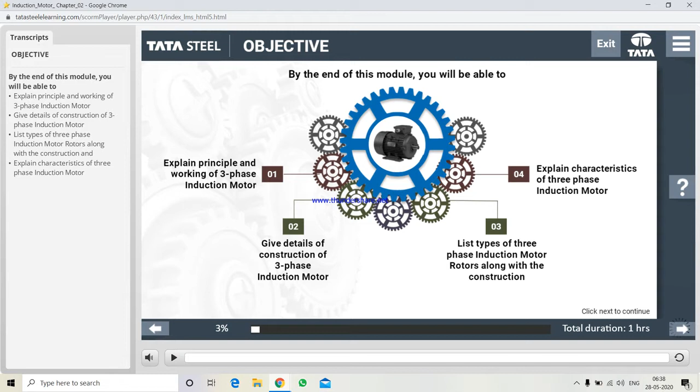With this, we are done with the single-phase induction motor. Now comes the three-phase induction motor.

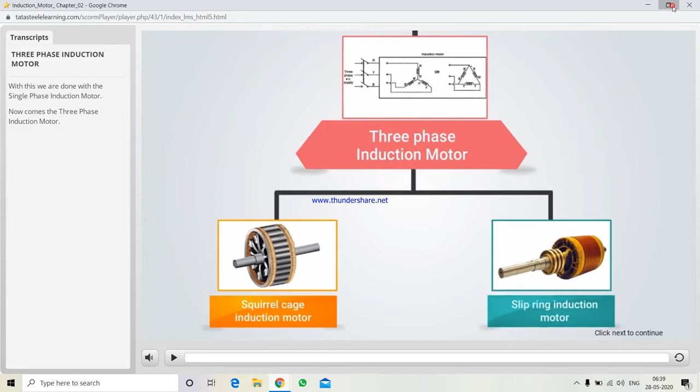Here are 4 questions related to three-phase induction motor. First, what is rotating magnetic field? Second, why is three-phase induction motor self-starting? Third, what is the working principle of three-phase induction motor? And fourth, why are they so common in industry? Click each to know the answer.

Balanced three-phase winding that is mechanically displaced by 120 degrees from each other, fed by balanced three-phase source, a rotating magnetic field with constant magnitude is produced, rotating with a constant speed called synchronous speed,

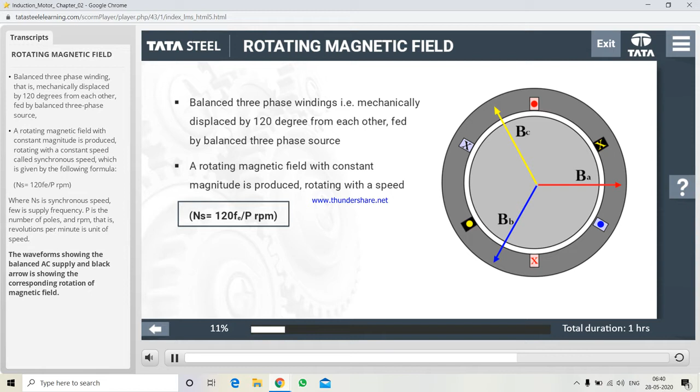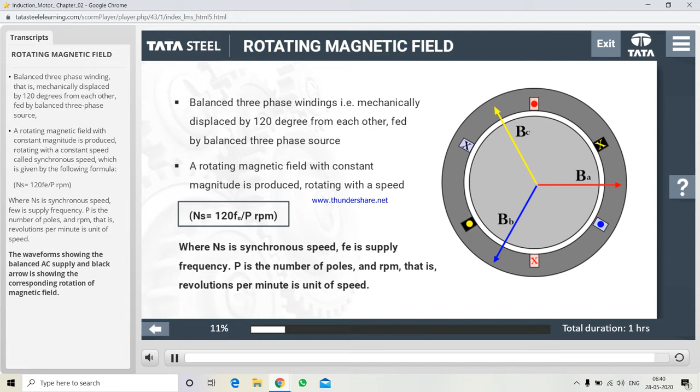which is given by the following formula: Ns equals 120 Fe upon P rpm, where Ns is synchronous speed, Fe is supply frequency, P is the number of poles, and rpm, that is revolutions per minute, is unit of speed. The waveforms show the balanced AC supply and the black arrow is showing the corresponding rotation of magnetic field.

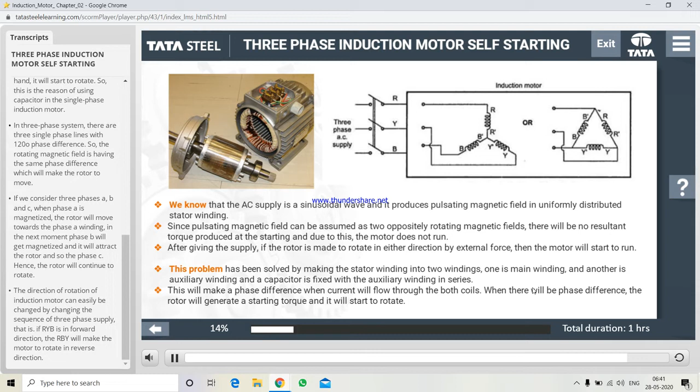This will make a phase difference when current will flow through both coils. When there is phase difference, the rotor will generate a starting torque and it will start to rotate. Practically, we can see that the fan does not rotate when the capacitor is disconnected from the motor. But if we rotate it with hand, it will start to rotate. So, this is the reason for using a capacitor in the single-phase induction motor.

In three-phase system, there are three single-phase lines with 120-degree phase difference. So, the rotating magnetic field has the same phase difference, which will make the rotor move. If we consider three phases, A, B and C, when phase A is magnetized, the rotor will move towards the phase A winding. In the next moment, phase B will get magnetized and it will attract the rotor, and so the phase C. Hence, the rotor will continue to rotate.

The direction of rotation of induction motor can easily be changed by changing the sequence of three-phase supply. That is, if RYB is in forward direction, RBY will make the motor rotate in reverse direction.

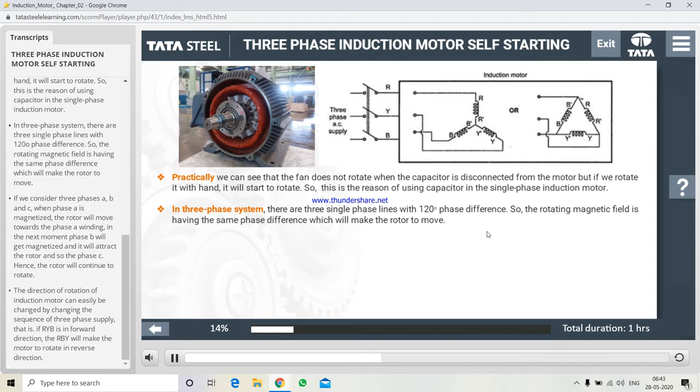Practically, we can see that the fan does not rotate when the capacitor is disconnected from the motor. But if we rotate it with hand, it will start to rotate. So, this is the reason for using a capacitor in the single-phase induction motor. In three-phase system, there are three single-phase lines with 120-degree phase difference. So, the rotating magnetic field has the same phase difference, which will make the rotor move.

If we consider three phases, A, B and C, when phase A is magnetized, the rotor will move towards the phase A winding. In the next moment, phase B will get magnetized and it will attract the rotor, and so the phase C. Hence, the rotor will continue to rotate. The direction of rotation of induction motor can easily be changed by changing the sequence of three-phase supply. That is, if RYB is in forward direction, RBY will make the motor rotate in reverse direction.

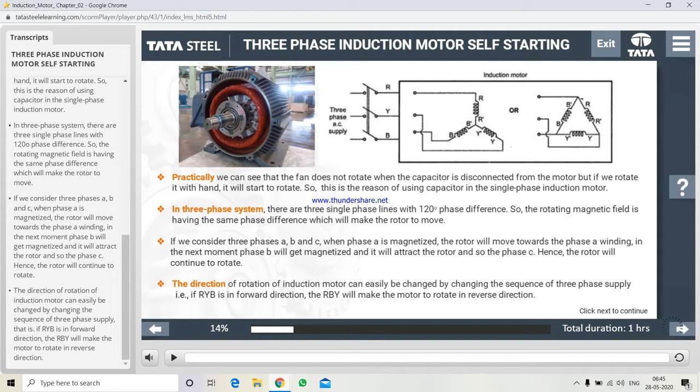The stator of the motor consists of overlapping winding offset by an electrical angle of 120 degrees. When the primary winding or the stator is connected to a three-phase AC source, it establishes a rotating magnetic field which rotates at the synchronous speed. From the working principle of three-phase induction motor, it may be observed that the rotor speed should not reach the synchronous speed produced by the stator.

If the speed equals, there would be no relative speed, so no EMF would be induced in the rotor and no current would be flowing, and therefore no torque would be generated. Consequently, the rotor will not be able to reach the synchronous speed. The difference between the stator or synchronous speed and rotor speeds is called the slip.

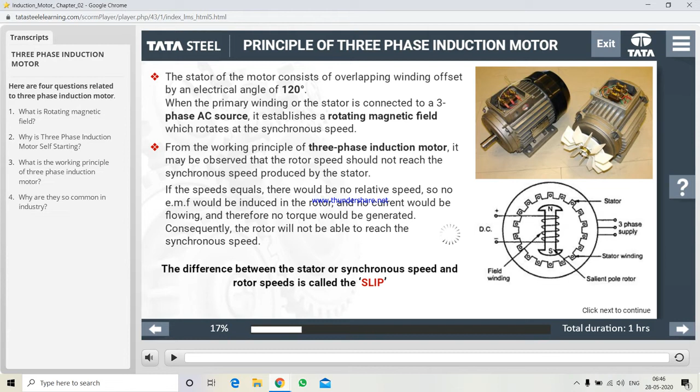Three-phase induction motors are very common because of the following points. Simple in construction, it has only one moving part. It doesn't have brush gear and commutator. Now comes with VSD technology, that is, variable speed drive.

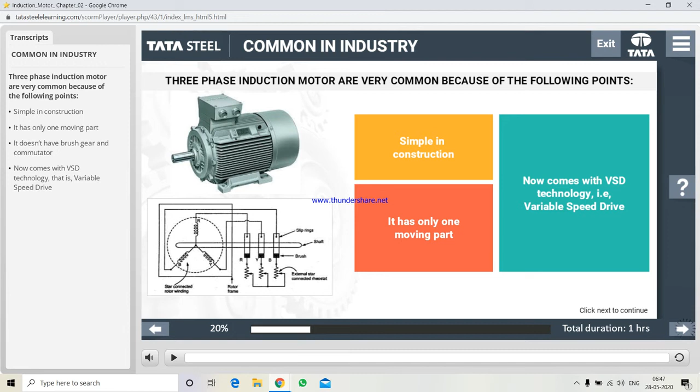Three-phase induction motor has two main parts, stator and rotor. Click each to get an overview. As its name indicates, stator is a stationary part of induction motor. A stator winding is placed in the stator of induction motor and the three-phase supply is given to it.

The rotor is a rotating part of induction motor. The rotor is connected to the mechanical load through the shaft. The rotor of the three-phase induction motor is further classified as squirrel cage rotor, slip ring rotor or wound rotor or phase wound rotor.

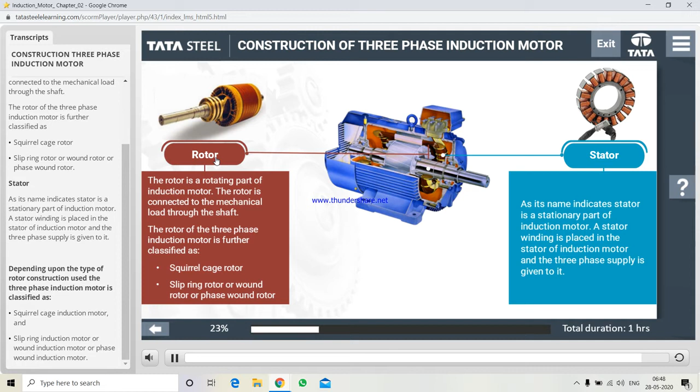Depending upon the type of rotor construction used, the three-phase induction motor is classified as squirrel cage induction motor and slip ring induction motor or wound induction motor or phase wound induction motor.

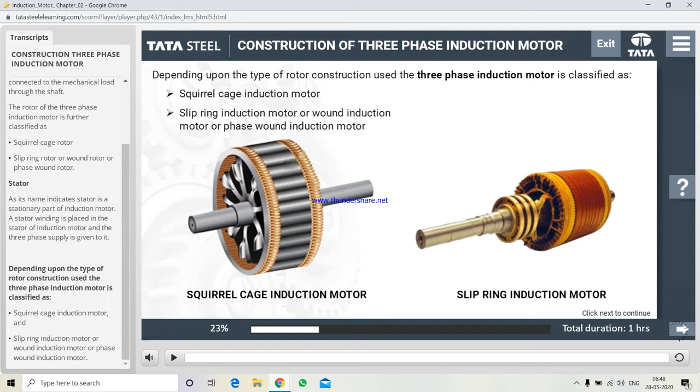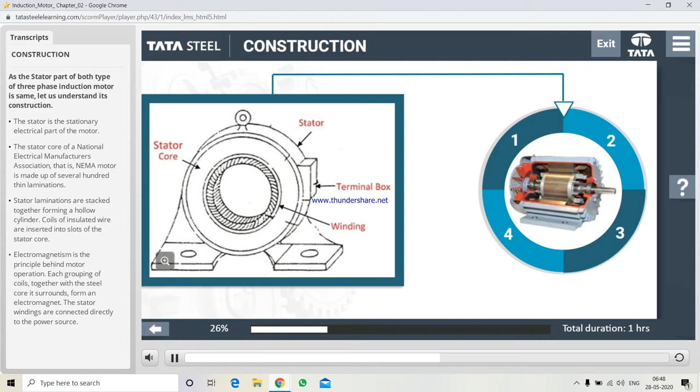As the stator part of both types of three-phase induction motor is the same, let us understand its construction. The stationary electrical part of the motor. The stator core of a National Electrical Manufacturers Association, that is, NEMA motor is made up of several hundred thin laminations. Stator laminations are stacked together, forming a hollow cylinder. Coils of insulated wire are inserted into slots of the stator core.

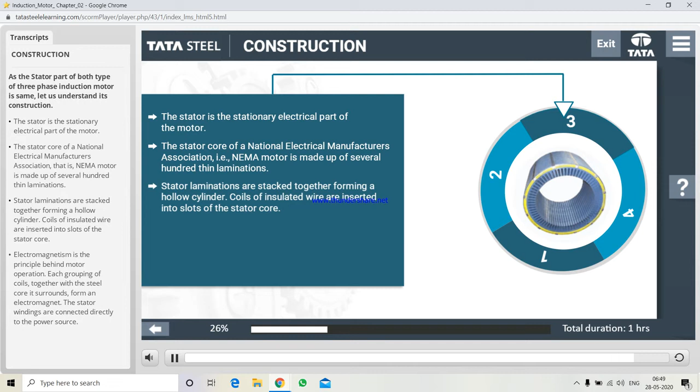Electromagnetism is the principle behind motor operation. Each grouping of coils, together with the steel core it surrounds, forms an electromagnet. The stator windings are connected directly to the power source.

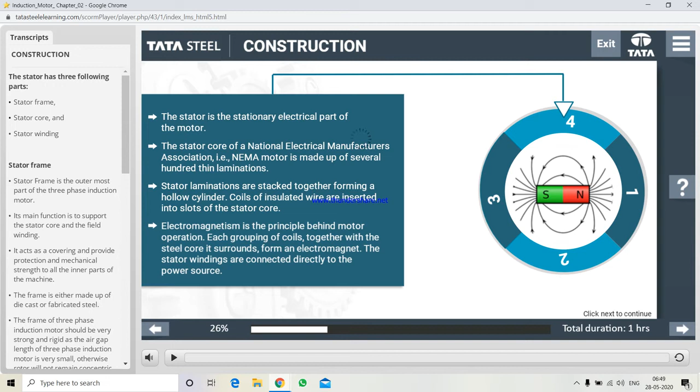The stator has three following parts: stator frame, stator core, and stator winding. Click each circle to know more. The main function of the stator core is to carry alternating flux. In order to reduce the eddy current losses, the stator core is laminated.

This laminated type of structure is made up of stampings, which are about 0.4 to 0.5 millimeter thick. All the stampings are stamped together to form the stator core, which is then housed in the stator frame. The stamping is generally made up of silicon steel, which reduces the hysteresis loss.

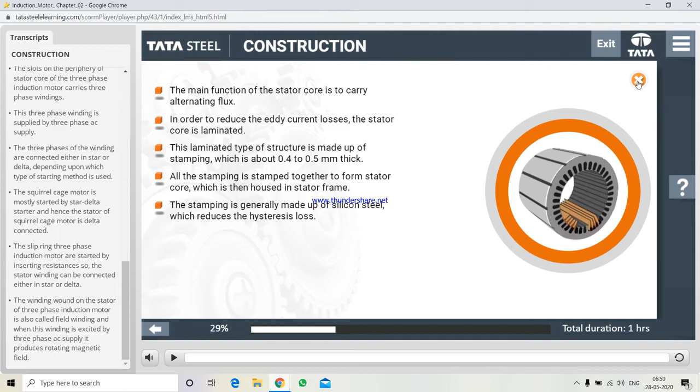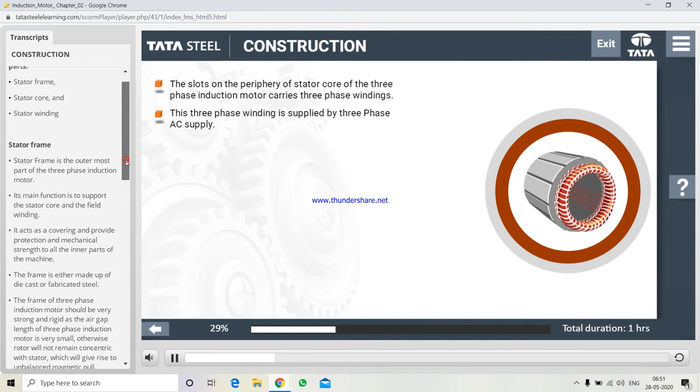The slots on the periphery of stator core of the three-phase induction motor carry three-phase windings. This three-phase winding is supplied by three-phase AC supply. The three phases of the winding are connected either in star or delta depending upon which type of starting method is used. The squirrel cage motor is mostly started by star-delta starter, and hence the stator of squirrel cage motor

is delta connected. The slip ring three-phase induction motors are started by inserting resistances, so the stator winding can be connected either in star or delta. The winding wound on the stator of three-phase induction motor is also called field winding, and when this winding is excited by three-phase AC supply, it produces rotating magnetic field.

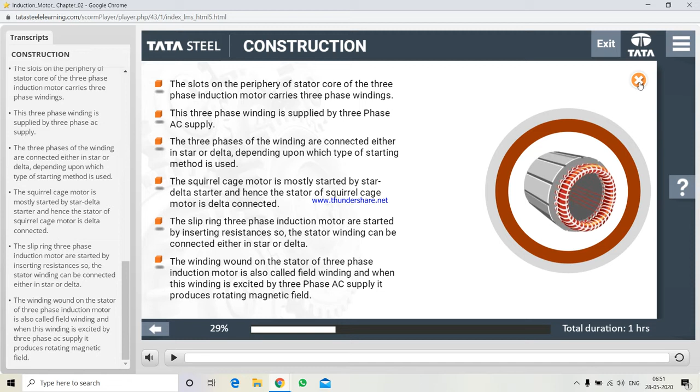Stator frame is the outermost part of the three-phase induction motor. Its main function is to support the stator core and the field winding. It acts as a covering and provides protection and mechanical strength to all the inner parts of the machine. The frame is either made up of die-cast or fabricated steel.

The frame of three-phase induction motor should be very strong and rigid, as the air gap length of three-phase induction motor is very small. Otherwise, rotor will not remain concentric with stator, which will give rise to unbalanced magnetic pull.

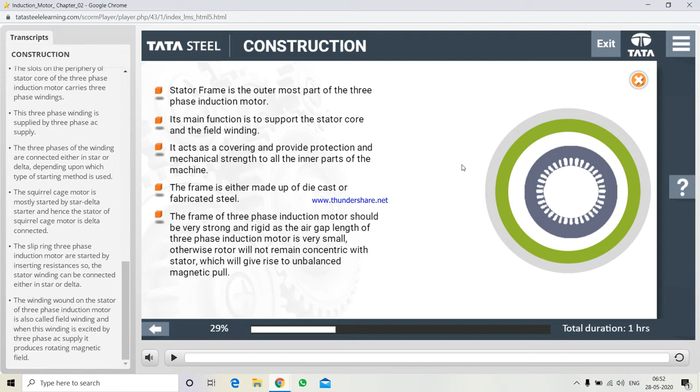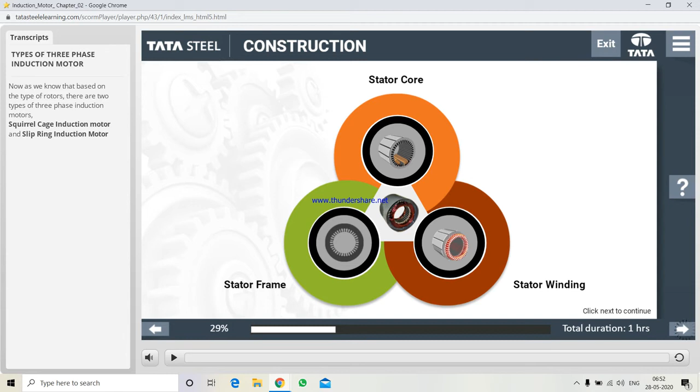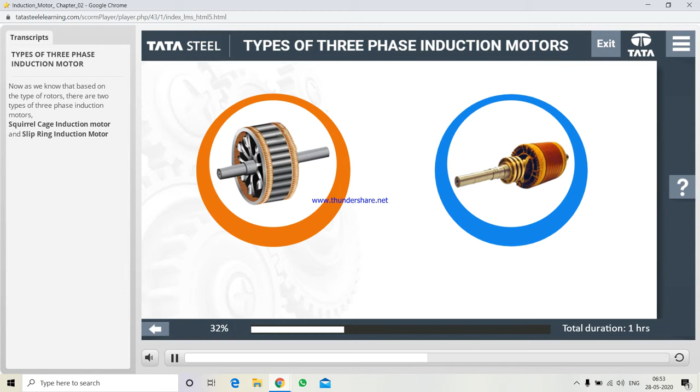Now, as we know that based on the type of rotors, there are two types of three-phase induction motors: squirrel cage induction motor and slip ring induction motor. Click each circle to know more.

The rotor of the squirrel cage three-phase induction motor is cylindrical in shape and has slots on the periphery. The slots are parallel to each other and are a bit skewed to prevent magnetic locking of the stator and rotor teeth, and make the working of the motor more smooth and quiet.

The squirrel cage rotor consists of aluminium, brass or copper bars that are placed in the slots on the periphery of the rotor. The rotor conductors are permanently shorted by copper or aluminium rings called the end rings, forming a complete closed circuit resembling a squirrel cage, hence the name squirrel cage induction motor.

The absence of slip rings and brushes makes the construction of the squirrel cage three-phase induction motor very simple and robust, and hence it is widely used as a three-phase induction motor. These motors have the advantage of adapting any number of pole pairs. The squirrel cage rotor winding is made symmetrical. As the bars are permanently shorted by end rings, the rotor resistance is very small and it is not possible to add external resistance.

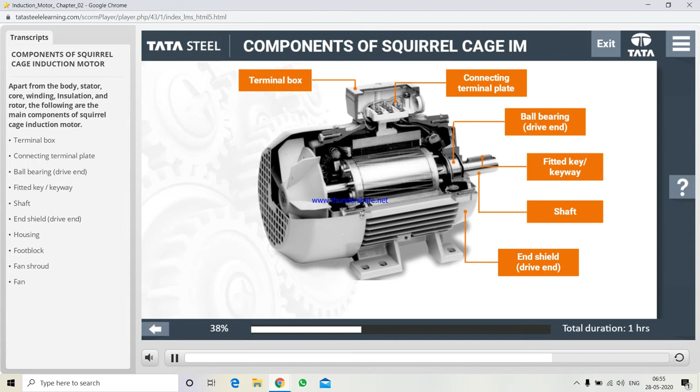Apart from the body, stator, core, winding, insulation and rotor, the following are the main components of the squirrel cage induction motor: terminal box, connecting terminal plate, ball bearing, drive end, fitted key or keyway, shaft, end shield, drive end, housing, foot block, fan shroud, fan. Click Next to continue.

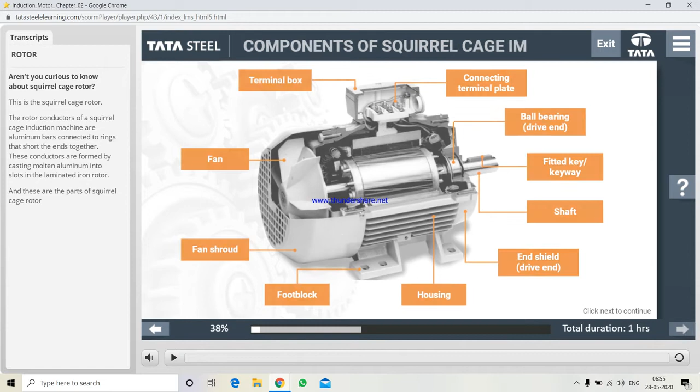Aren't you curious to know about the squirrel cage rotor? Click the thumbs up to know more. This is the squirrel cage rotor. Click the image to go inside the rotor.

The rotor conductors of a squirrel cage induction machine are aluminium bars connected to rings that short the ends together. These conductors are formed by casting molten aluminium into slots in the laminated iron rotor. And these are the parts of the squirrel cage rotor. Click Next to continue.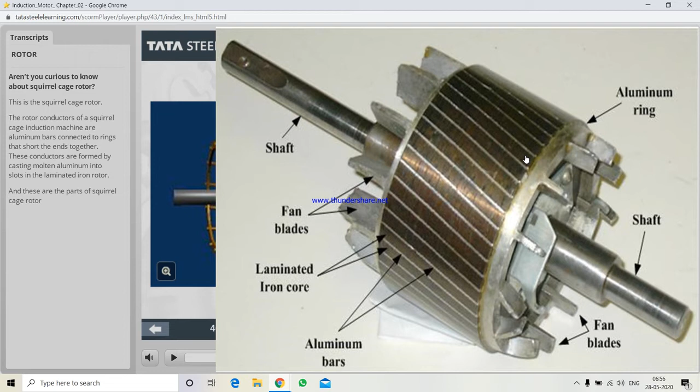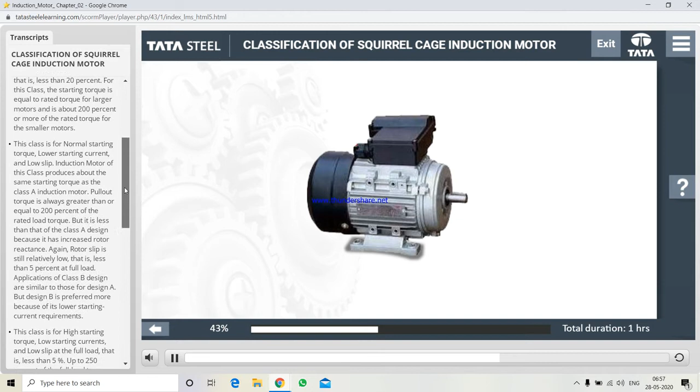NEMA, the National Electrical Manufacturers Association in the United States, and IEC in Europe have classified the design of squirrel cage induction motors based on their speed-torque characteristics into classes. These classes are Class A, Class B, Class C, Class D, Class E and Class F.

This class is for high starting torque, low starting currents and low slip at full load, that is less than 5%. The starting torque in this class of design is up to 250% of the full load torque. The pull-out torque is lower than that for Class A induction motors. In this design, the motors are built from double cage rotors. They are more expensive than motors of Class A and B. Class C designs are used for high starting torque loads like loaded pumps, compressors, and conveyors.

This class is for very low starting torque, normal starting current, and low slip. Compensator or resistance starters are used to control starting current.

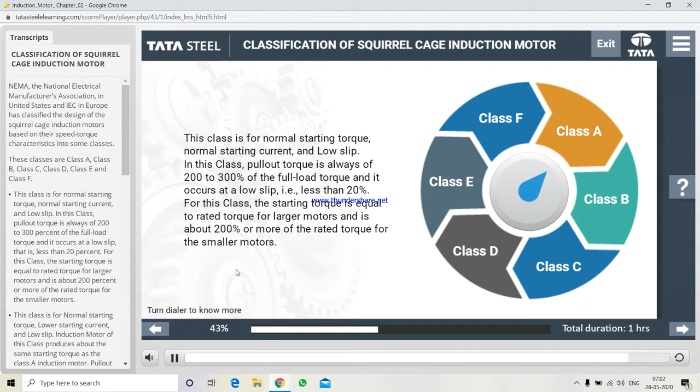This class is for normal starting torque, lower starting current, and low slip. Motor of this class produces about the same starting torque as the Class A induction motor. Pull-out torque is always greater than or equal to 200% of the rated load torque. But it is less than that of the Class A design because it has increased rotor reactance. Again, rotor slip is still relatively low, that is less than 5% at full load.

Applications of Class B design are similar to those for Design A, but Design B is preferred more because of its lower starting current requirements. In this class, motors have very high starting torque of around 275% or more of the rated torque. The motors of this class have low starting current and high slip at full load.

Also, in this class of design, the high rotor resistance shifts the peak torque to a very low speed. It is even possible at 0 speed or 100% slip for the highest torque to occur in this class of design. Full load slip, which is typically 7 to 11%, but may go as high as 17% or more, is quite high in this class because of the high rotor resistance.

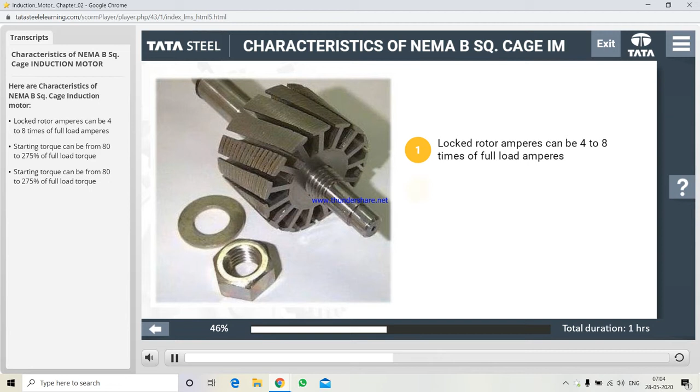Here are characteristics of NEMA B squirrel cage induction motor. Locked rotor amperes can be 4 to 8 times of full load amperes. Starting torque can be from 80 to 275% of full load torque. Breakdown torque can be from 175 to 300% of full load torque.

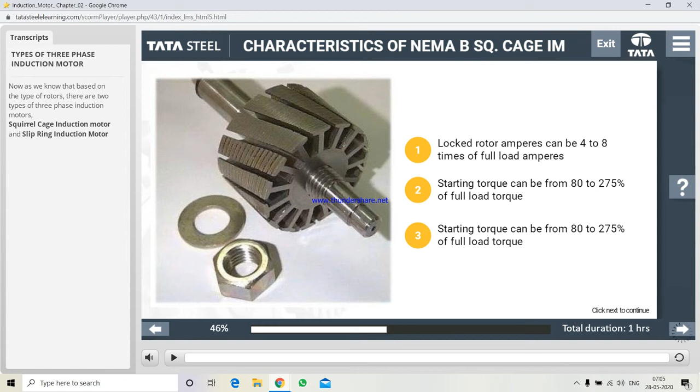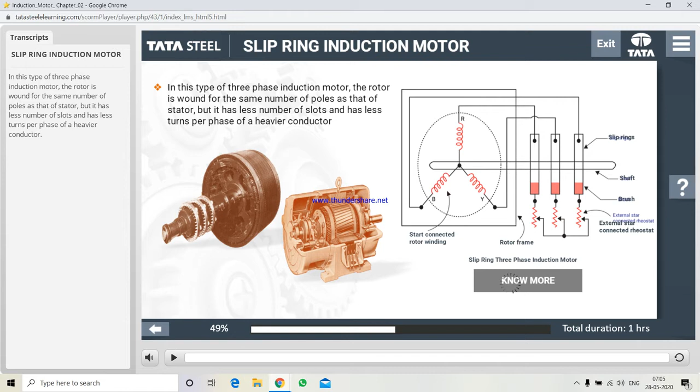In this type of three-phase induction motor, the rotor is wound for the same number of poles as that of stator, but it has less number of slots and has less turns per phase of a heavier conductor. The rotor consists of numbers of slots and rotor windings are placed inside these slots. The three end terminals are connected to form star connection.

At starting, the resistances are connected in rotor circuit and are gradually cut out as the rotor picks up its speed. When the motor is running, the slip rings are shorted by connecting a metal collar which connects all slip rings together, and the brushes are also removed. This reduces wear and tear of the brushes. Due to presence of slip rings and brushes, the rotor construction becomes somewhat complicated. Therefore, it is less used as compared to squirrel cage induction motor.

As its name indicates, it consists of slip rings connected on same shaft as that of rotor. The three ends of three-phase windings are permanently connected to these slip rings. The slip rings are insulated from each other and the rotor shaft. The brushes are used to carry current to and from the rotor winding. These brushes are further connected to three-phase star-connected resistances. The external resistance can be easily connected through the brushes and slip rings and hence can be used for speed control and improvement of the starting torque of the motor.

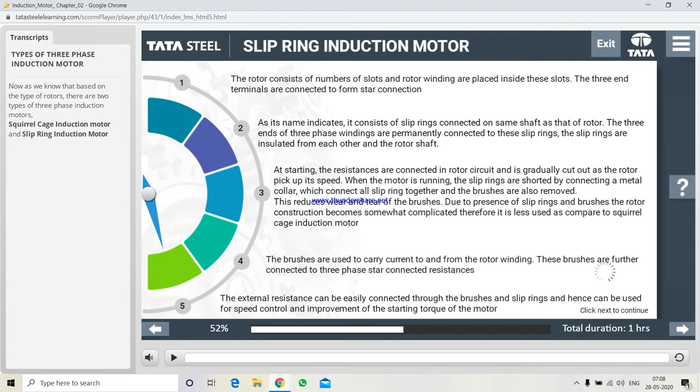To refresh our knowledge of both squirrel cage induction motor and slip ring induction motor, let us quickly go through the difference between them. 1. Construction of slip ring induction motor is complicated due to presence of slip ring and brushes, whereas the construction of squirrel cage induction motor is very simple. Second, here the rotor winding is similar to the stator winding, but in squirrel cage induction motor, the rotor consists of rotor bars, which are permanently shorted with the help of end rings.

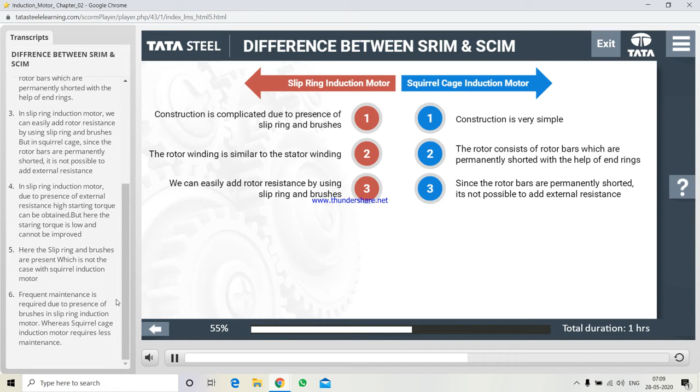3. In slip ring induction motor, we can easily add rotor resistance by using slip ring and brushes. But in squirrel cage, since the rotor bars are permanently shorted, it is not possible to add external resistance. 4. In slip ring induction motor, due to presence of external resistance, high starting torque can be obtained. But here, the starting torque is low and cannot be improved.

5. Here, the slip ring and brushes are present, which is not the case with squirrel cage induction motor. 6. Frequent maintenance is required due to presence of brushes in slip ring induction motor, whereas squirrel cage induction motor requires less maintenance. Click Next to continue.

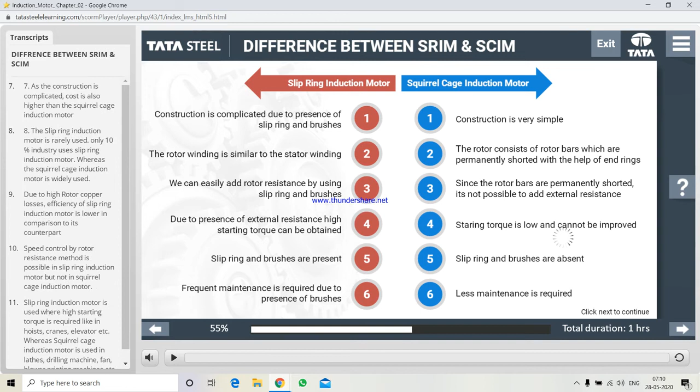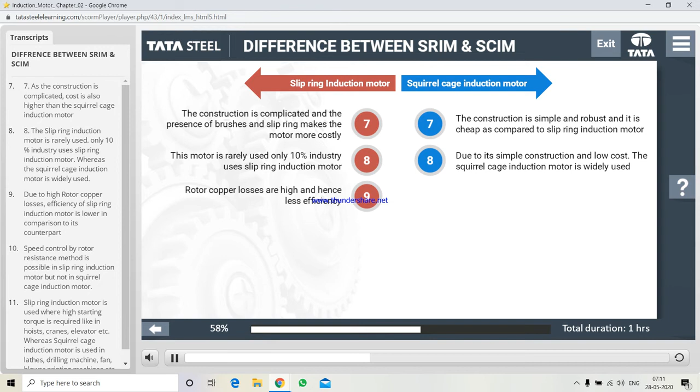7. As the construction is complicated, cost is also higher than the squirrel cage induction motor. 8. The slip ring induction motor is rarely used. Only 10% of industry uses slip ring induction motors, whereas the squirrel cage induction motor is widely used. 9. Due to high rotor copper losses, efficiency of the slip ring induction motor is lower in comparison to its counterpart.

10. Speed control by the rotor resistance method is possible in the slip ring induction motor, but not in the squirrel cage induction motor. 11. The slip ring induction motor is used where high starting torque is required, like in hoists, cranes, elevators, etc. Whereas the squirrel cage induction motor is used in lathes, drilling machines, fans, blowers, printing machines, etc.

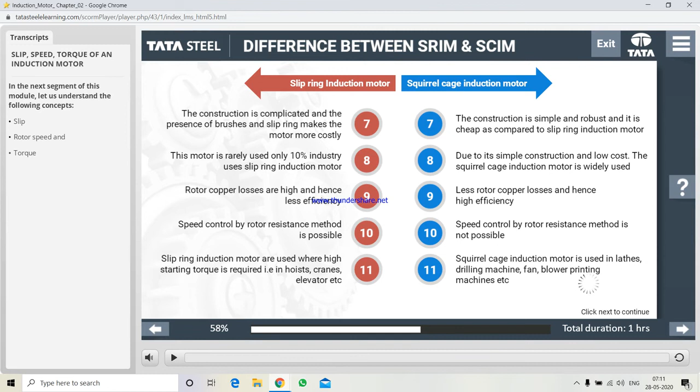In the next segment of this module, let us understand the following concepts: slip, rotor speed and torque. Click each to know more.

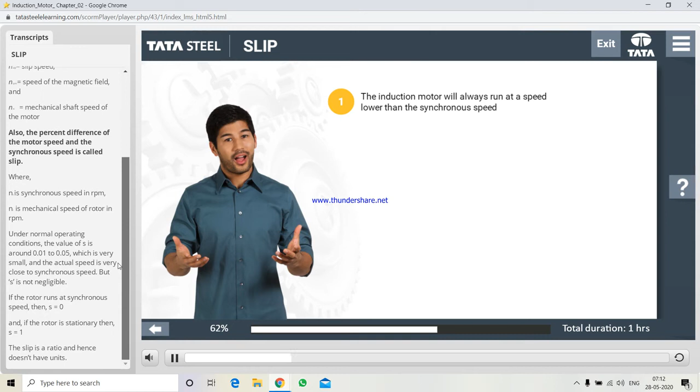As we already know, the induction motor will always run at a speed lower than the synchronous speed. The difference between the motor speed and the synchronous speed is called the slip speed, where n slip equals slip speed, n sync equals speed of the magnetic field, and nm equals mechanical shaft speed of the motor. Also, the percent difference of the motor speed and the synchronous speed is called slip, where ns is synchronous speed in rpm, nr is mechanical speed of rotor in rpm.

Under normal operating conditions, the value of s is around 0.01 to 0.05, which is very small, and the actual speed is very close to synchronous speed, but s is not negligible. If the rotor runs at synchronous speed, then s equals 0, and if the rotor is stationary, then s equals 1. The slip is a ratio and hence doesn't have units.

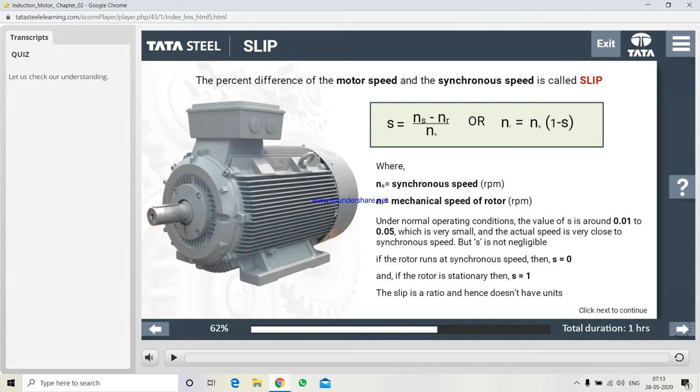Let us check your understanding.

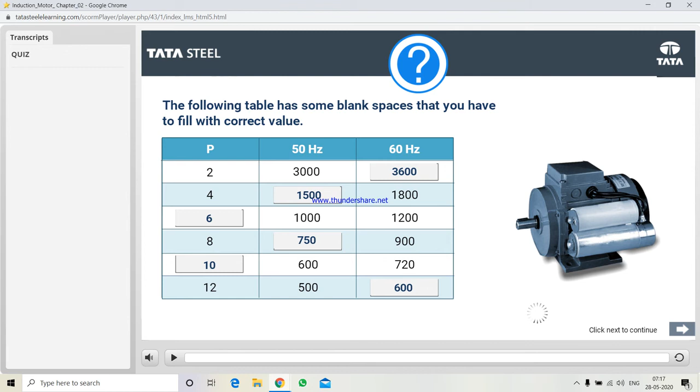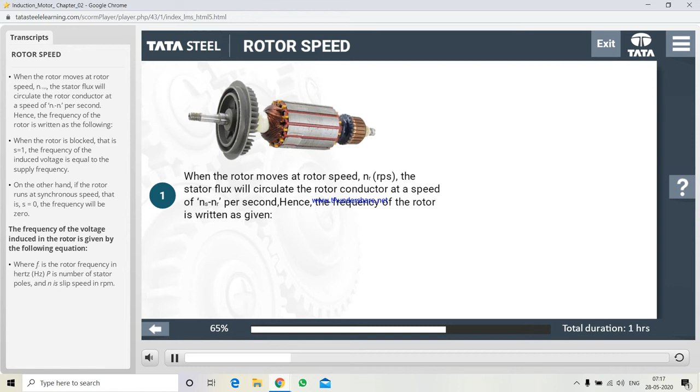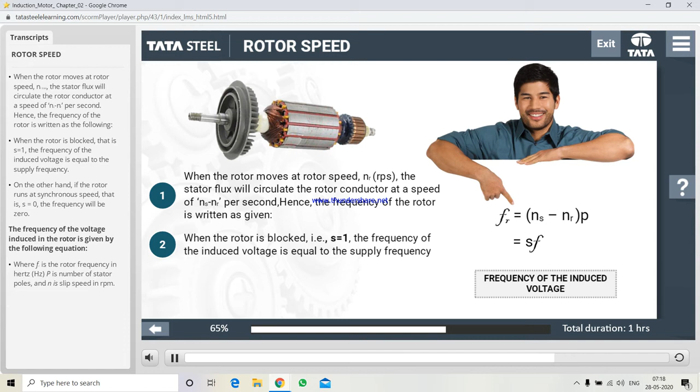When the rotor moves at rotor speed nr rps, the stator flux will circulate the rotor conductor at a speed of ns minus nr per second. Hence, the frequency of the rotor is written as following. When the rotor is blocked, that is S equals 1, the frequency of the induced voltage is equal to the supply frequency. On the other hand, if the rotor runs at synchronous speed, that is S equals 0, the frequency will be 0.

The frequency of the voltage induced in the rotor is given by the following equation, where Fr is the rotor frequency in Hertz, P is number of stator poles, and N is slip speed in RPM.

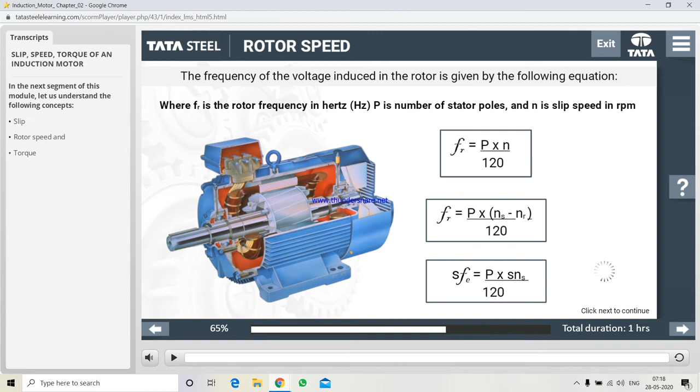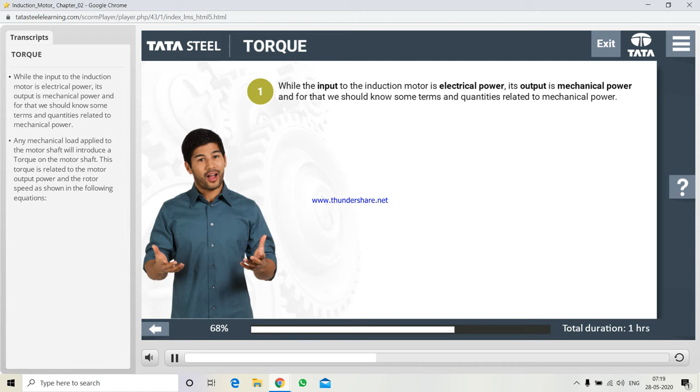While the input to the induction motor is electrical power, its output is mechanical power, and for that we should know some terms and quantities related to mechanical power. Any mechanical load applied to the motor shaft will introduce a torque on the motor shaft. This torque is related to the motor output power and the rotor speed as shown in the following equations.

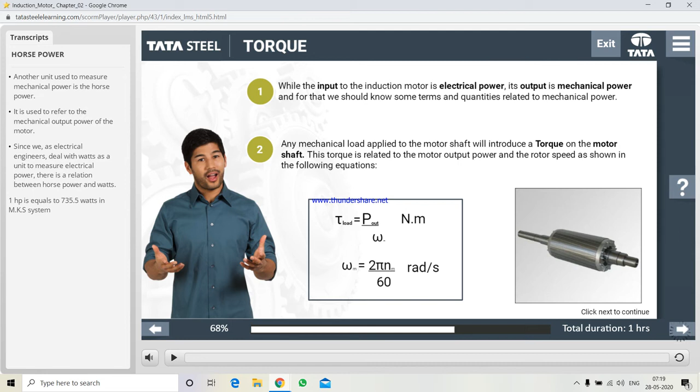Another unit used to measure mechanical power is the horsepower. It is used to refer to the mechanical output power of the motor. Since we, as electrical engineers, deal with watts as a unit to measure electrical power, there is a relation between horsepower and watts. 1 horsepower is equal to 735.5 watts.

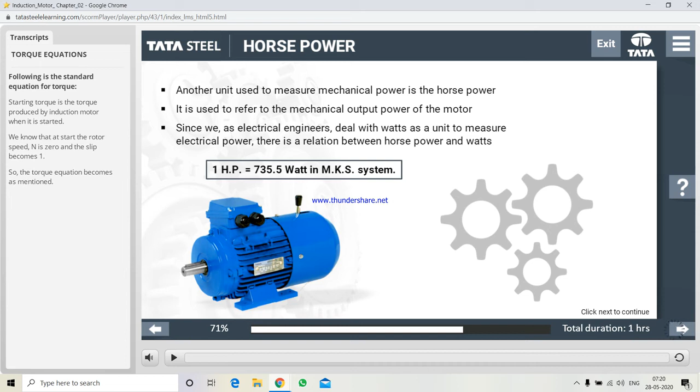Following is the standard equation for torque. Starting torque is the torque produced by the induction motor when it is started. We know that at start the rotor speed n is 0 and the slip becomes 1. So the torque equation becomes as mentioned.

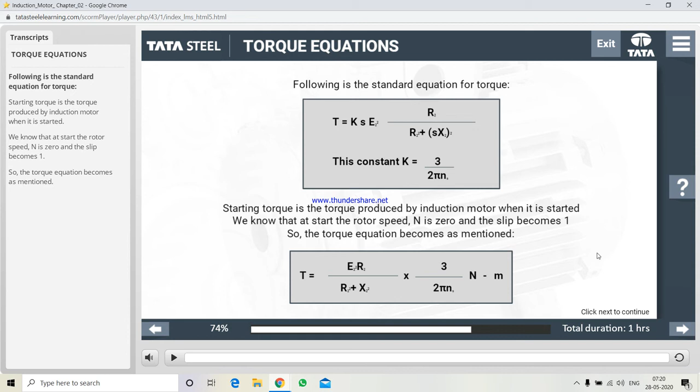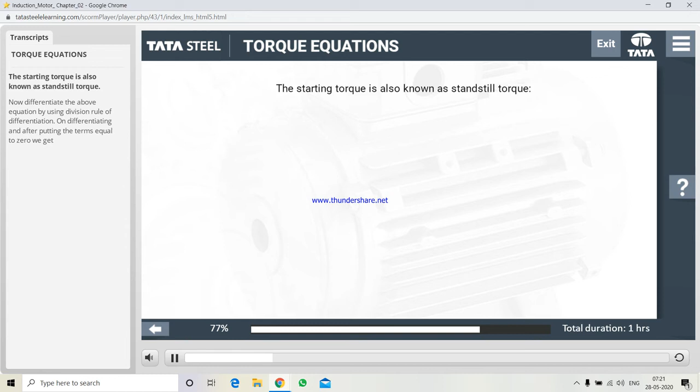The starting torque is also known as standstill torque. Now differentiate the above equation by using the division rule of differentiation. On differentiating and after putting the terms equal to 0, we get.

Note, at starting, S equals 1, so the maximum starting torque occurs when rotor resistance is equal to rotor reactance.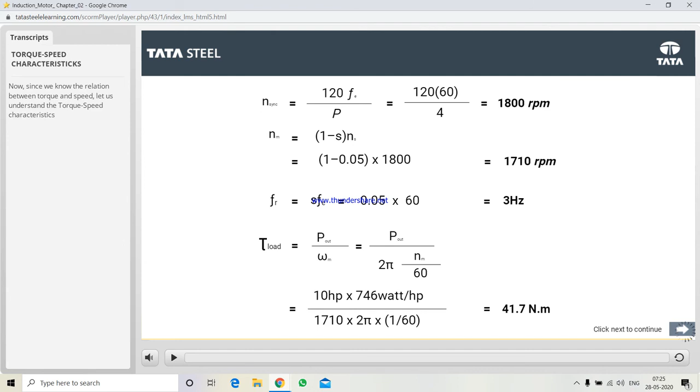Now, since we know the relation between torque and speed, let us understand the torque-speed characteristics. This is the torque-speed graph. Let us understand it with the following points. 1. The induced torque is 0 at synchronous speed. 2. The curve is nearly linear between no load and full load.

In this range, the rotor resistance is much greater than the reactance. So the rotor current torque increases linearly with the slip. 3. The maximum possible torque that can't be exceeded is called pull-out torque and is 2 to 3 times the rated full load torque. 4. The starting torque of the motor is slightly higher than its full load torque. So the motor will start carrying any load it can supply at full load.

5. The torque of the motor for a given slip varies as the square of the applied voltage. 6. If the rotor is driven faster than synchronous speed, it will run as a generator, converting mechanical power to electrical power.

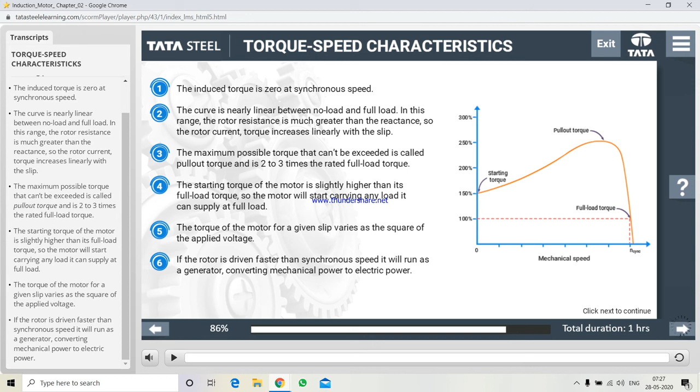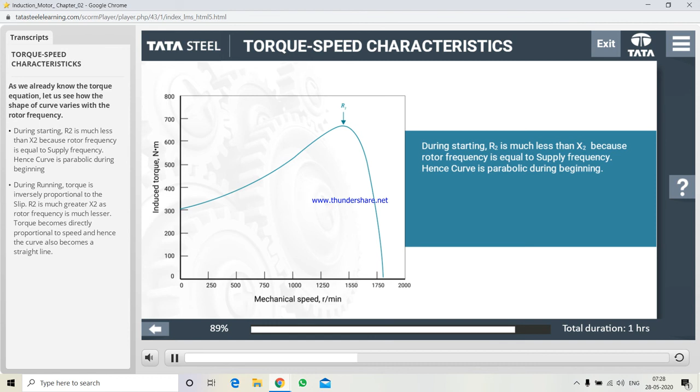As we already know the torque equation, let us see how the shape of curve varies with the rotor frequency. During starting, R2 is much less than X2 because rotor frequency is equal to supply frequency. Hence, curve is parabolic during beginning. During running, torque is inversely proportional to the slip. R2 is much greater than X2 as rotor frequency is much lesser. Torque becomes directly proportional to speed and hence the curve also becomes a straight line.

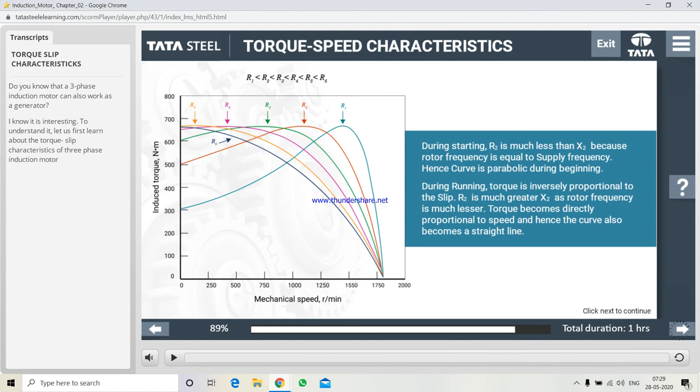Do you know that a three-phase induction motor can also work as a generator? I know it is interesting. To understand it, let us first learn about the torque-slip characteristics of three-phase induction motor.

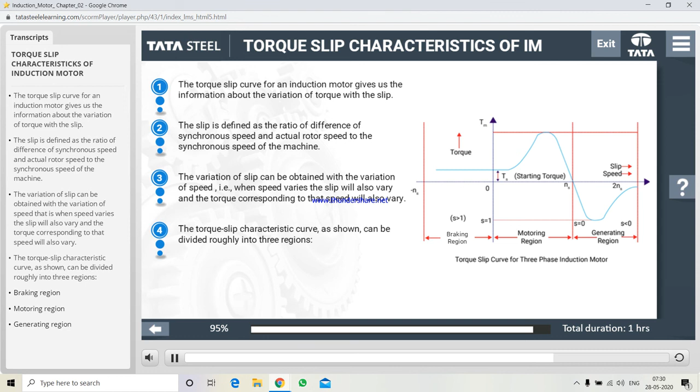The torque-slip curve for an induction motor gives us the information about the variation of torque with the slip. The slip is defined as the ratio of difference of synchronous speed and actual rotor speed to the synchronous speed of the machine. The variation of slip can be obtained with the variation of speed, that is, when speed varies, the slip will also vary and the torque corresponding to that speed will also vary. The torque-slip characteristic curve, as shown, can be divided roughly into three regions: braking region, motoring region, generating region.

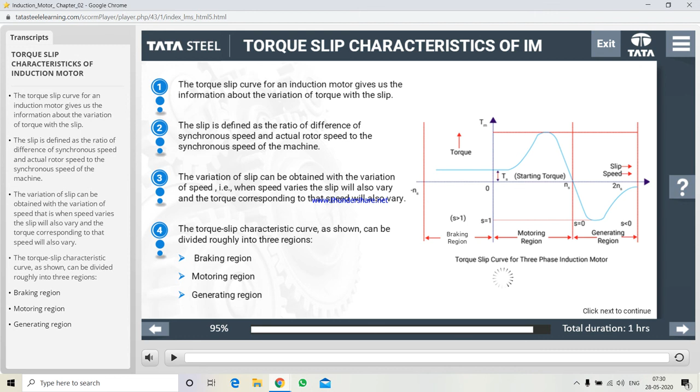In this mode of operation, supply is given to the stator sides and the motor always rotates below the synchronous speed. The slip varies from 0 to 1. It is 0 at no load and 1 at standstill. From the curve, it is seen that the torque is directly proportional to the slip. That is, more is the slip, more will be the torque near synchronous speed.

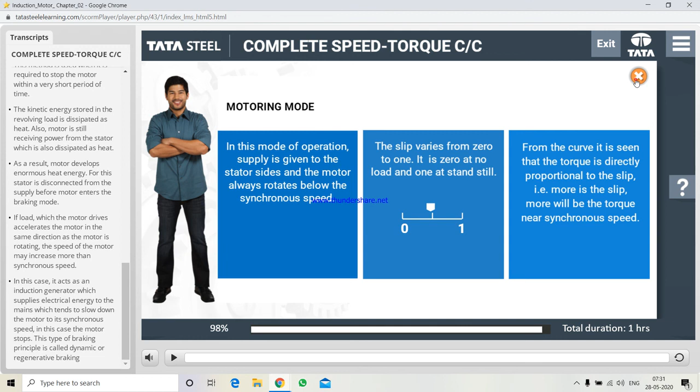In this mode of operation, induction motor runs above the synchronous speed and it should be driven by a prime mover. The stator winding is connected to a three-phase supply in which it supplies electrical energy. In this case, the torque and slip both are negative, so the motor receives mechanical energy and delivers electrical energy. Induction motor is not much used as generator because it requires reactive power for its operation.

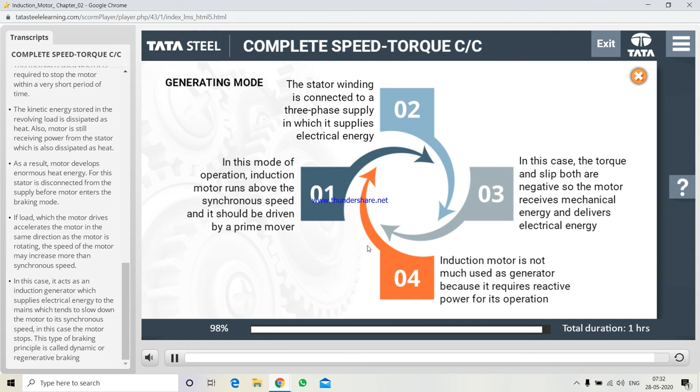In the braking mode, the two leads or the polarity of the supply voltage is changed so that the motor starts to rotate in the reverse direction and as a result the motor stops. This method of braking is known as plugging. This method is used when it is required to stop the motor within a very short period of time.

The kinetic energy stored in the revolving load is dissipated as heat. Also, motor is still receiving power from the stator, which is also dissipated as heat. As a result, motor develops enormous heat energy. For this, stator is disconnected from the supply before motor enters the braking mode.

If load which the motor drives accelerates the motor in the same direction as the motor is rotating, the speed of the motor may increase more than synchronous speed. In this case, it acts as an induction generator which supplies electrical energy to the mains, which tends to slow down the motor to its synchronous speed. In this case, the motor stops. This type of braking principle is called dynamic or regenerative braking.